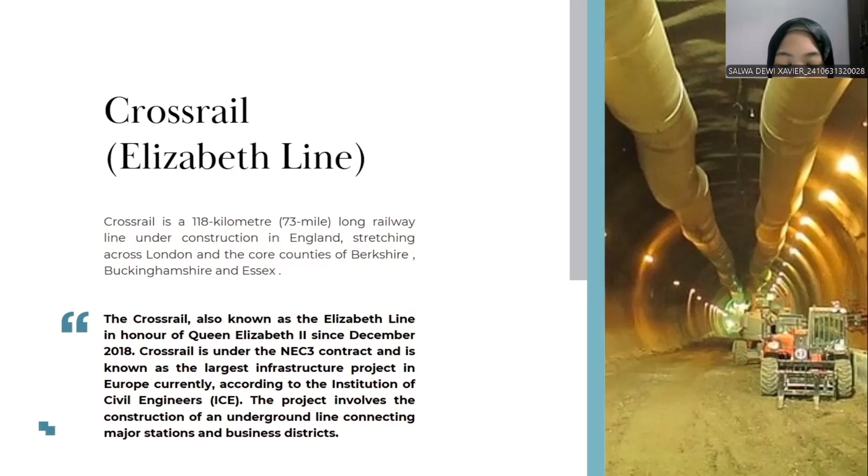Crossrail is under the NEC 3 contract and is known as the largest infrastructure project in Europe currently, according to the Institution of Civil Engineers, or ICE. The project involves the construction of an underground line connecting major stations and business districts.

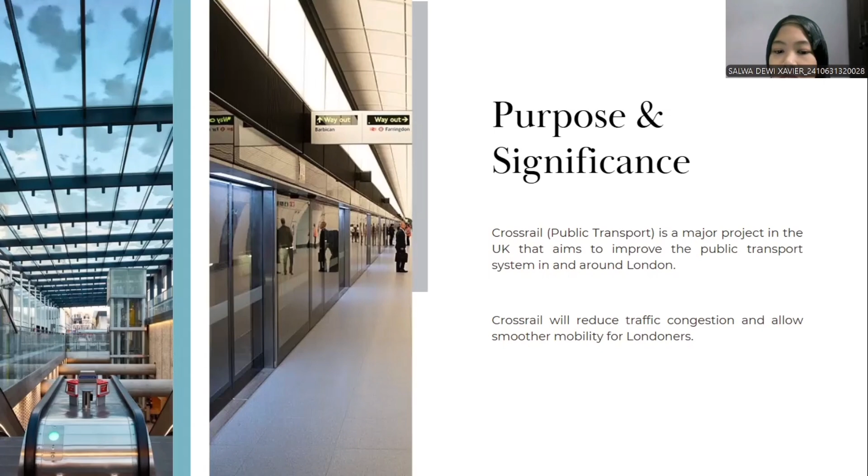Next, there is purpose and significance. The first is Crossrail, or public transport, is a major project in the UK that aims to improve the public transport system in and around London. And the second is Crossrail will reduce traffic congestion and allow smoother mobility for Londoners.

Next, there are advantages and benefits of Crossrail. Crossrail has many advantages and benefits, but there are also some drawbacks, such as cost overruns and delays. It was originally planned to open in 2018, but only officially opened in 2022, causing frustration and economic impact.

Next, complex engineering. Building tunnels under an already crowded underground system was risky and required advanced technology and planning. Next, construction disruption. And last, ongoing maintenance costs. High quality infrastructure requires continuous and expensive upkeep over time.

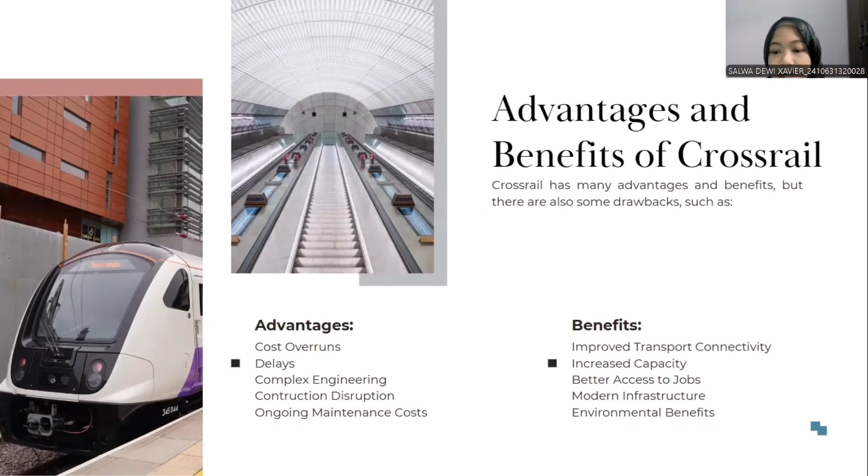Next, there are design and materials. The first material is concrete. Concrete is a primary material in Crossrail, particularly for tunnel linings and station structures. The project prioritizes increasing the recycled content in concrete by using cement substitutes like ground granulated blast furnace slag or GGBS, and pulverized fuel ash.

And sprayed concrete. Sprayed concrete lining or SCL was used in mined stations. SCL stabilizes the wider tunnel profile, so rebar is used sparingly. And next, blockwork. Blockwork was used for internal walls in stations and shafts, with a focus on analyzing blockwork products containing higher than standard recycled content.

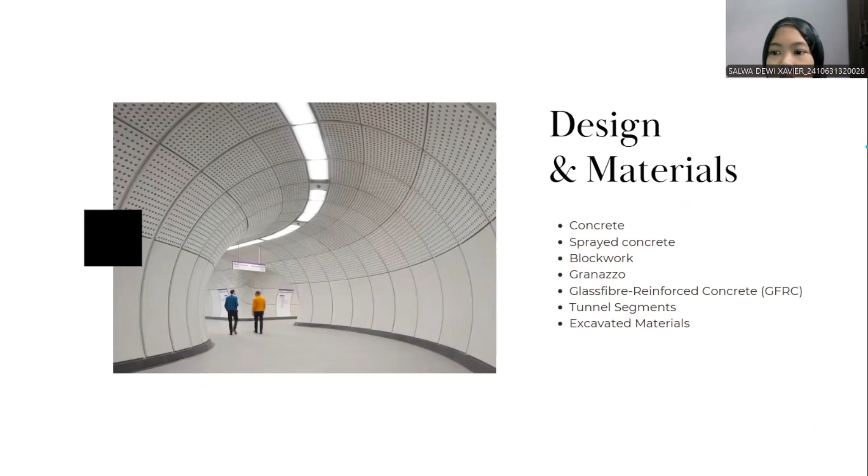Next, the second is stations. 81 escalators were installed at the 9 new stations, at 60 meters or 200 feet in length. The escalators at Bond Street are 1 meter shorter than the escalators at Angel, the longest escalator on the Underground. All stations in the central section were built to be step-free from street to train, with 54 lifts installed in the 9 new stations.

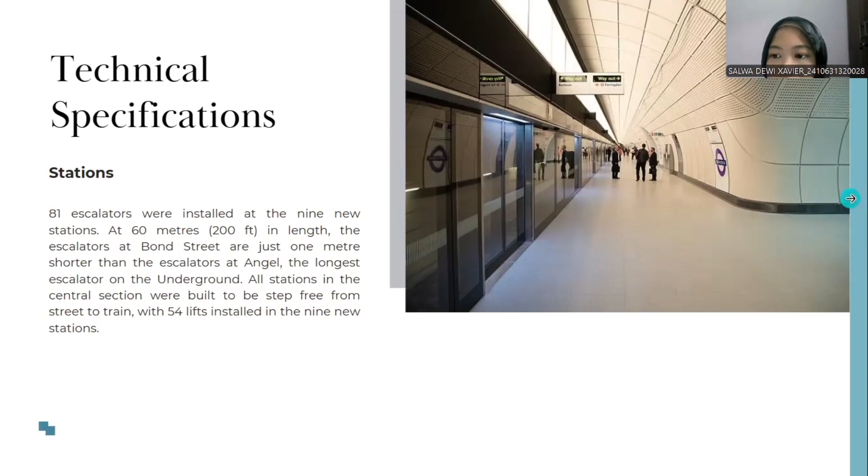Next, there are tunnels. The wide diameter tunnels allow for new Class 345 rolling stock, which is larger than the traditional deep level tube trains. The tunnels allow for emergency evacuation of passengers through the side doors rather than along the length of the train.

Next, electrification and signaling. Crossrail uses 25 kV 50 Hz overhead lines, which are also used on the Great Eastern and Great Western main lines.

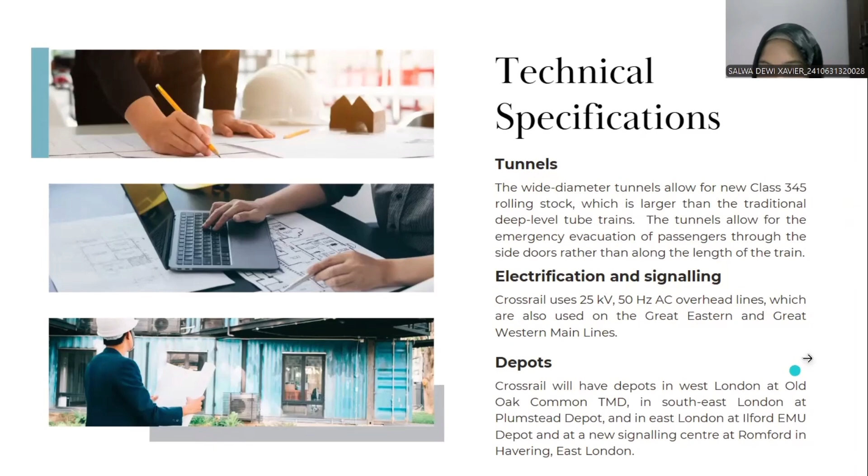Next, depots. Crossrail will have depots in West London at Old Oak Common TMD, in Southeast London at Plumstead Depot, and in East London at Ilford EMU Depot, and at a new signalling centre at Romford in Havering, East London.

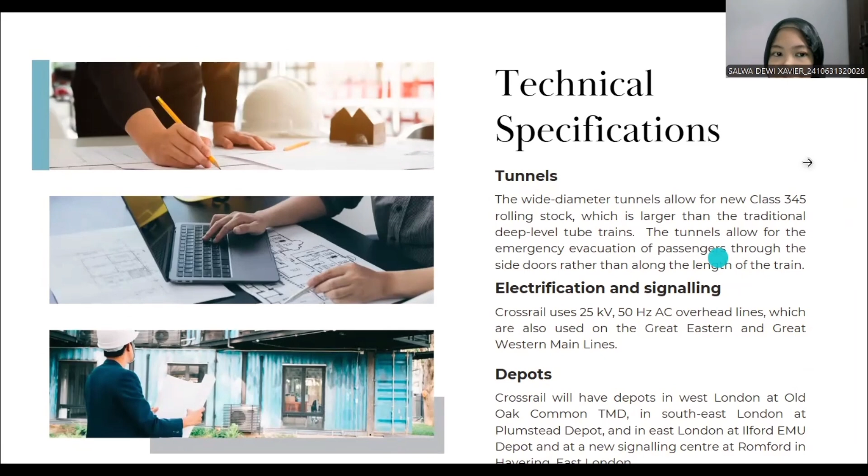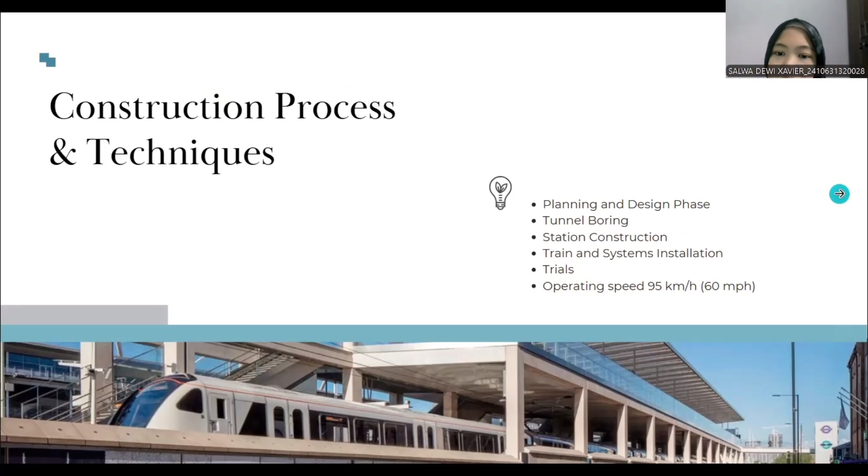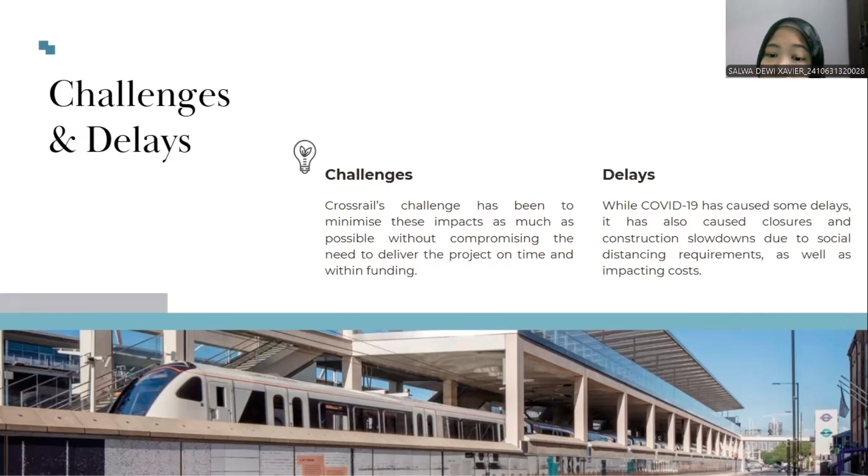Next, there are challenges and delays. Crossrail's challenge has been to minimize these impacts as much as possible, without compromising the need to deliver the project on time and within funding. As for the delays, COVID-19 has caused some delays, closures, and construction slowdowns due to social distancing requirements, as well as impacting costs.

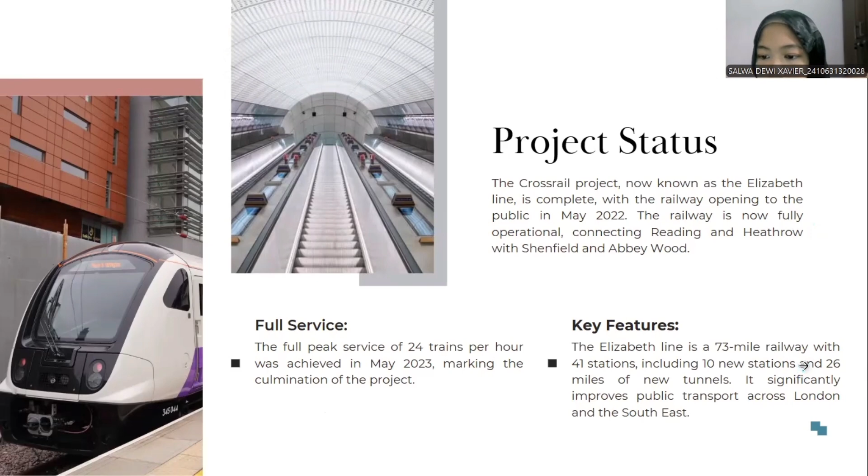For the key features, the Elizabeth Line is a 73-mile railway with 41 stations, including 10 new stations, and 26 miles of new tunnels. It significantly improves public transport access across London and the Southeast.

Lastly, for the conclusion, despite the challenges, the Elizabeth Line is now operational and providing significant benefits to London and the Southeast. It stands as a major infrastructure achievement, but the lessons learned from its delivery are crucial for future major projects.

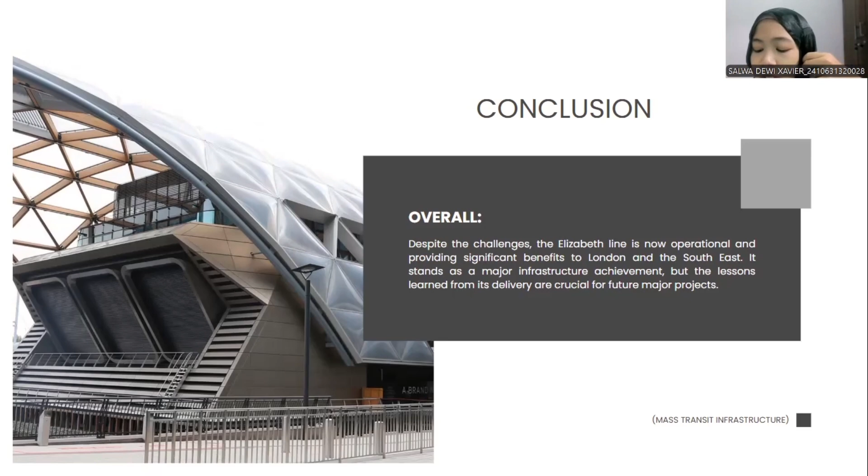Positive opinions. Next, my opinions. I believe that the Crossrail project, despite its delays and budget challenges, is a highly successful and transformative infrastructure initiative. It has greatly improved London's public transportation by reducing journey times, increasing rail capacity, and connecting previously underserved areas.

For positive opinions, in my opinion, there is transformational impact, because Crossrail is a transformative project that will significantly increase London's rail capacity and improve connectivity and economic benefits.

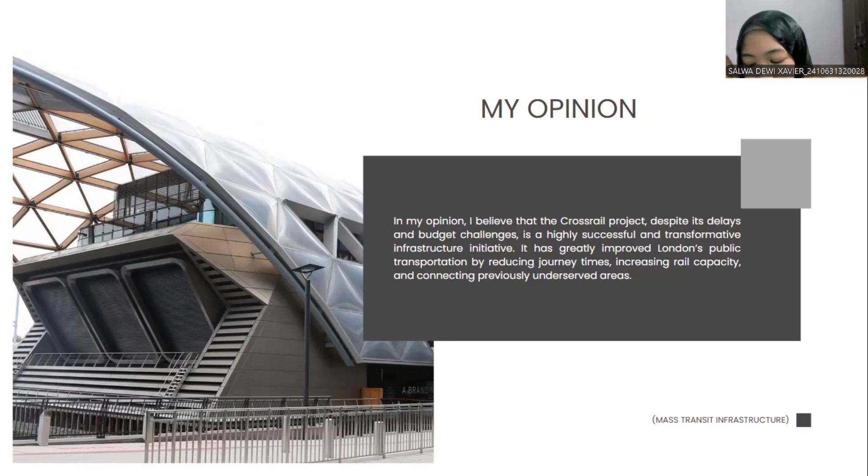The project is expected to bring economic benefits to London, increasing property values, business opportunities, and improving the public realm near stations.

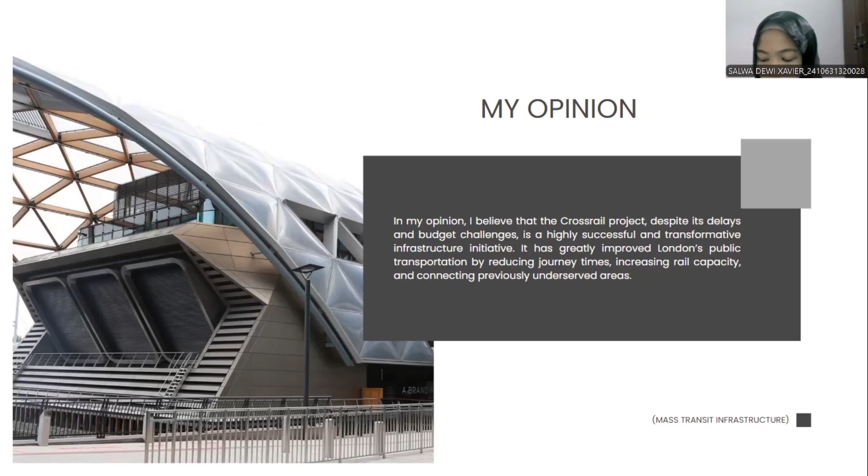And lastly, I think it has also helped to build a strong international brand for London and the UK, attracting foreign investment.